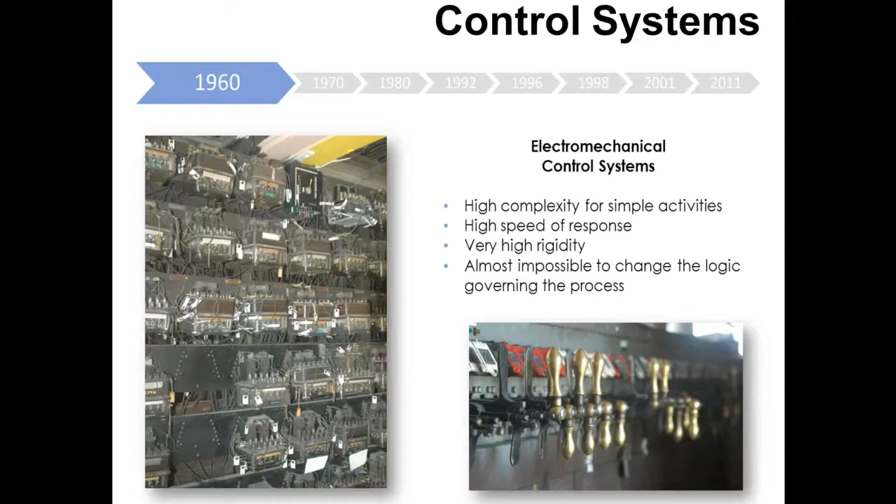In the 70s, something changed, and the main thing was that this guy, Dick Morley, installed the first PLC at the General Motors Oldsmobile. Looking at that device from our days, it's a very low performance device, but it introduced a new element in control system: flexibility and configurability. So the ability to change the logic that controls the process in an easy and user-friendly way.

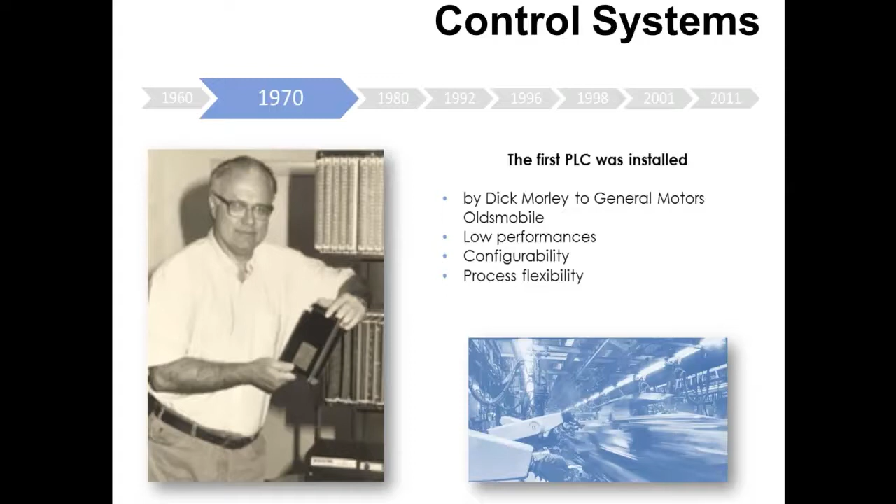In the 80s, we see the coming of personal computers. They are small size, low cost, low performance devices, but they are easy to program, and this enables to think to a new utilization of this kind of devices even in the industrial world.

In 1992, the timeline of the control system intersects my personal experience as I start to work in an industrial automation company. And what I face from the beginning is that the PLC is taking over the electromechanical logics. There are still some dedicated analog boards to perform control tasks, especially speed control or synchronism between motors and so on. But almost all the complex logics are in charge of the PLC.

The cost of the CPU is reducing, the flexibility is increasing, and the programming tools are absolutely becoming user-friendly. And this enables a wide number of users to develop programs to perform process control. On the other side, the human-machine interface is many times still developed using aluminum boards with LEDs or lamps to indicate the status of the devices.

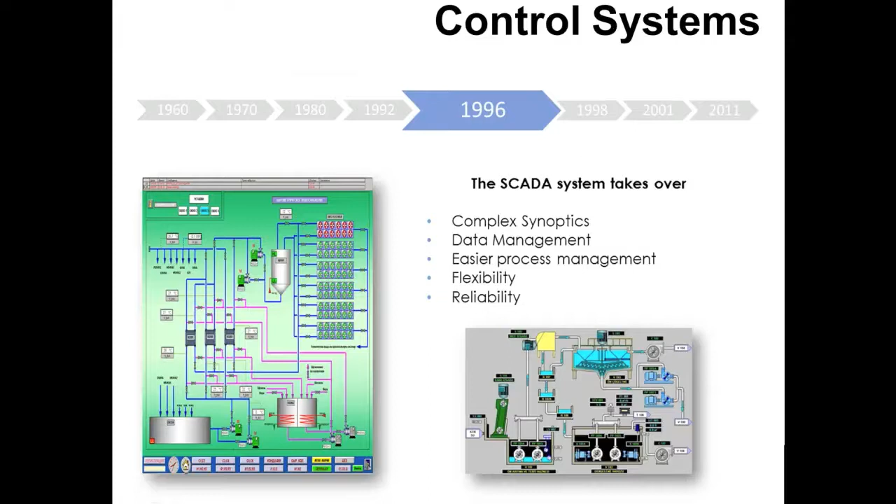1996, as I told you, we start Autoware, and we start to develop SCADA systems, and SCADA systems are going very fast to take over the aluminum panels because they enable the development of complex synoptics, they enable to start to do some data management, they make the process management task easier for the operators, and mainly, again, they introduce flexibility and reliability.

1998 is an important year for us. We developed the first performance control system or performance measurement system. It's a pretty simple system, but it manages downtime management, it manages good and waste count, it provides real-time information to operators, it replaces almost all the paperwork in the company to collect this information, and it permits the company to increase the efficiency by about 30%.

Why is this important? It's important in my opinion because the focus for the first time, at least for us, is not anymore in the process control, but it's in the process performance measurement, which is something completely different from the beginning.

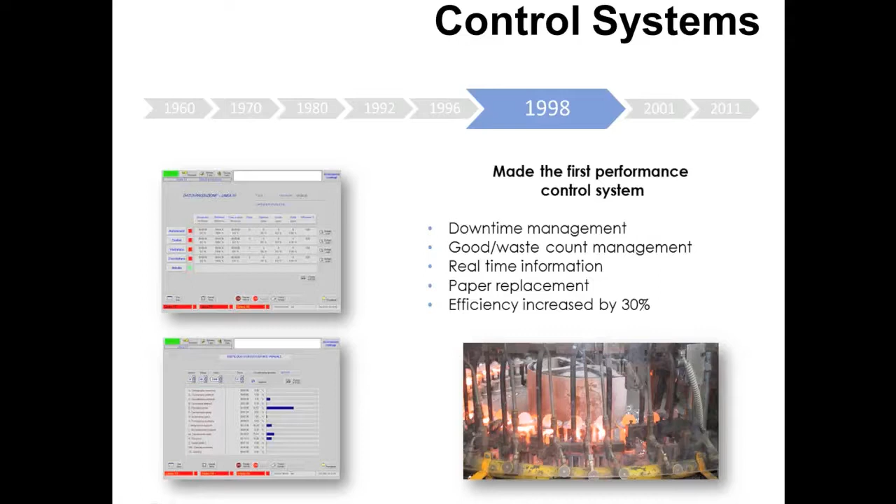2001, a new step further, we created the first complete MES system. The focus is not anymore just on performance management, but this MES system manages raw material, tracking, tracing, production order dispatching, identification, efficiency of course, and it interfaces with the warehouse management system to upload the data regarding the finished

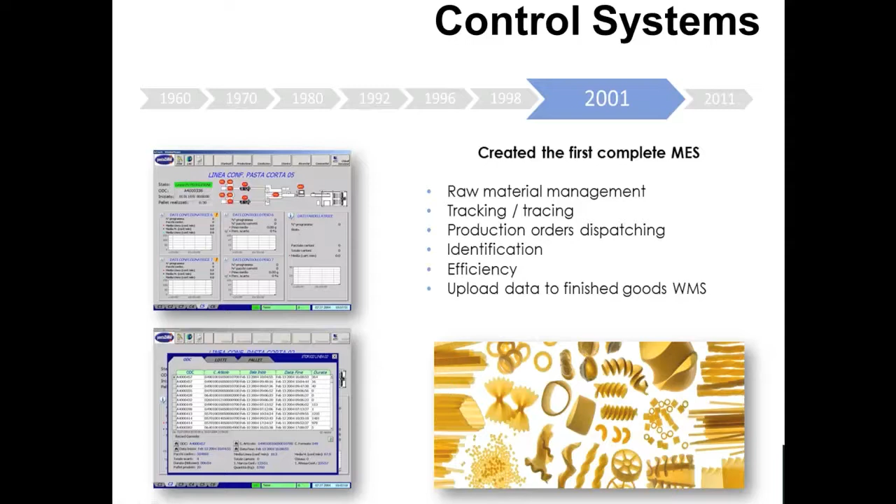goods. So again, this is important because the focus in this case is not on the process, but it's on the coordination of different processes that constitute the operations. What about 2011? What have we to expect? Well,

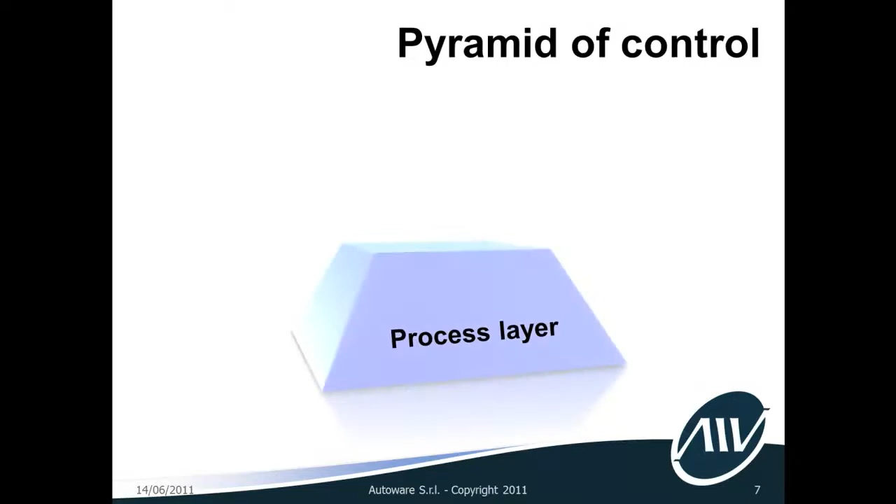we all know the pyramid of control. It's a well-known pyramid, 3-layer pyramid, where at the bottom we have the process layer. It's a layer of devices, it's a layer of actuators. In the middle we have the control layer. It's the layer where the PLC implements all the process rules and all the process control.

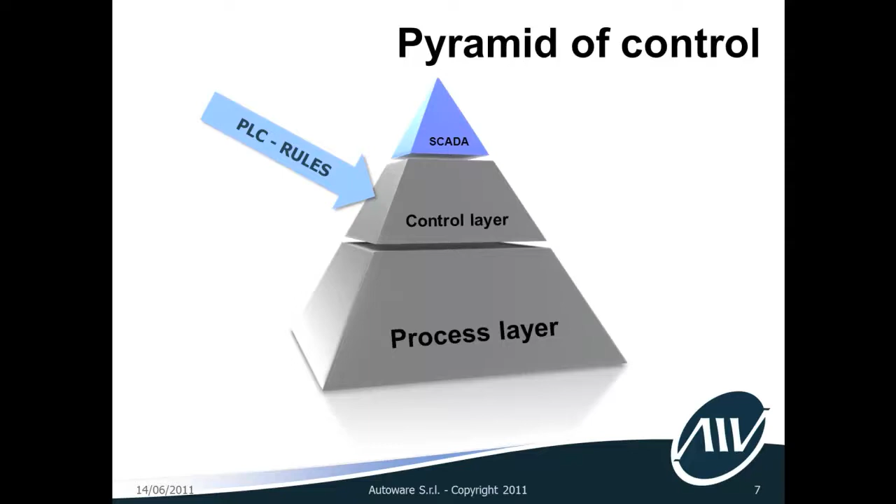And then on the top we have the SCADA layer. It's a layer where the information is presented to the user, where the inputs are collected, and where the information is displayed. During time, this pyramid evolved, and all the control pyramid that we just saw is embedded in a new bottom layer, which is called shop floor layer.

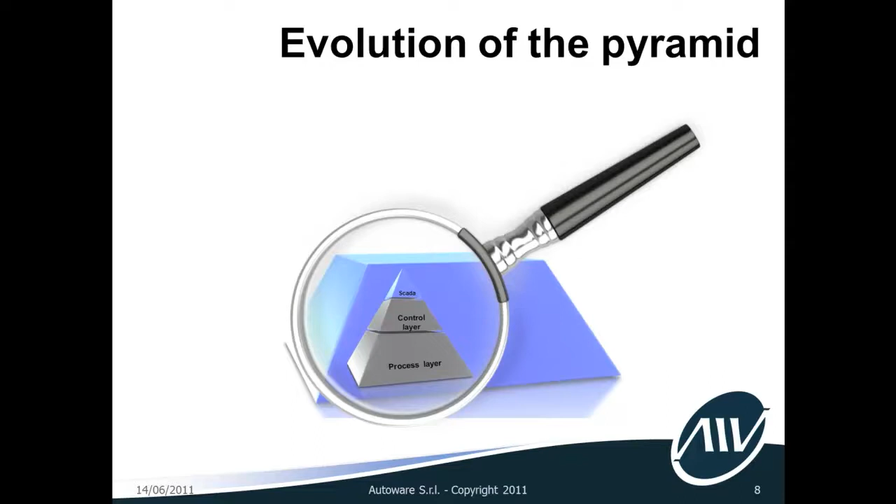On the top we have the ERP, which is the layer of strategic decision in a company, and in the middle we have the gap that is normally filled by MES, or as the MESA, the Manufacturing Execution System Association, now starts to call MOM, Manufacturing Operations Management Systems. And these are systems that have as a goal to fill the gap between the shop floor and the ERP and make these two different worlds communicate with each other.

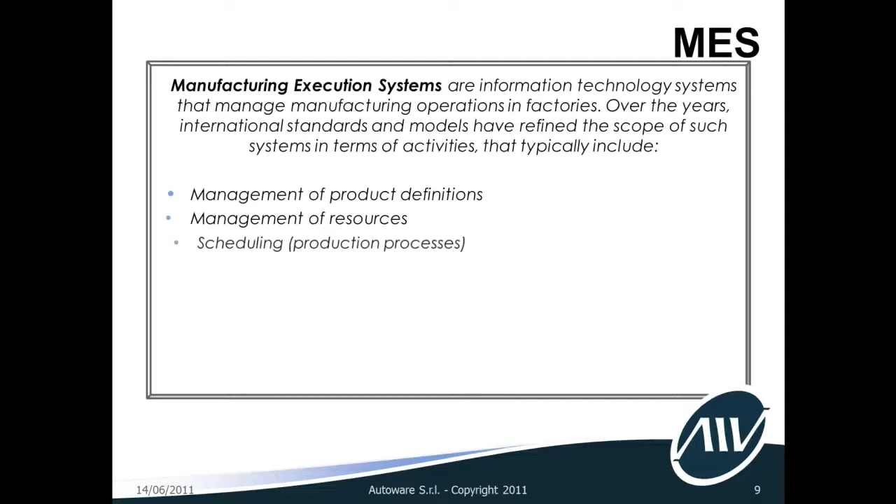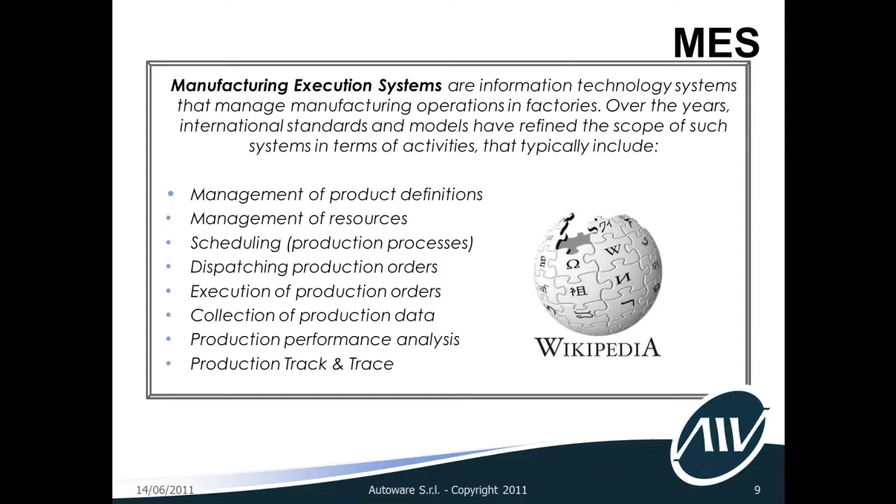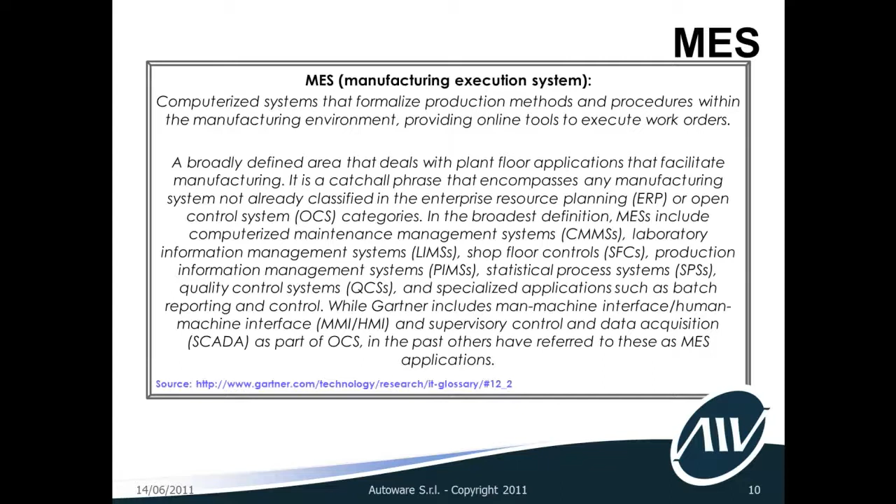What are MES systems? There are many different definitions that you can find about them. They vary from the very easy definitions like the one that you can find on Wikipedia that focus on the different functionalities of MES systems, to more business-related and complex definitions like this one from the Gartner Group, to a description in terms of a standard model that was approved by the MESA, which defines the MES system in terms of data, relationships, flows of information.

But the definition that I like more is the definition that one of our customers provided. And he said in 2002 that MES means meglio esserne senza, which translated in English is it's better to be without it. But in 2007, for him, MES was mai esserne senza, which means never be without it. And in my opinion, this is a measure of how important an MES system became in a company. So important that the company itself feels that it cannot work without it anymore.

The market of MES systems is still a growing market. There is a lot of potentiality in it. From this study, from an analysis of Frost and Sullivan, the market in 2009 was about $3.6 billion, and is going to become a market of $8.2 billion in 2016. So it's going to double in almost 7 years. So there's a lot of work to do in implementing MES systems, and there's a lot of space working on them.

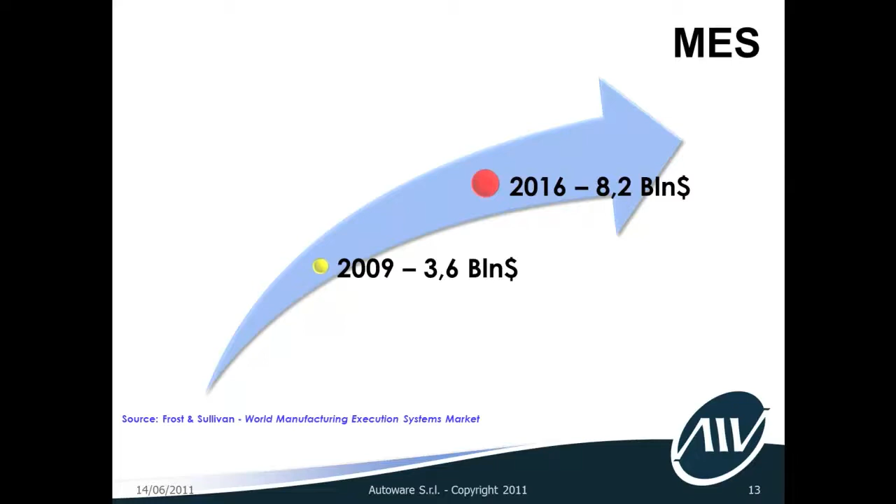But MES systems are even showing some limits, and the limits are mainly related to some staticity, especially if compared to an organizational environment that is changing frequently and terribly fast. Many actions are still dependent, even if the company has an MES system, on the human factor. There's no guarantee about responses, and the flow of information and decision is just partially managed. Or, on the other side, all these things can be accomplished, but all these activities and all these rules have to be hard-coded in the system.

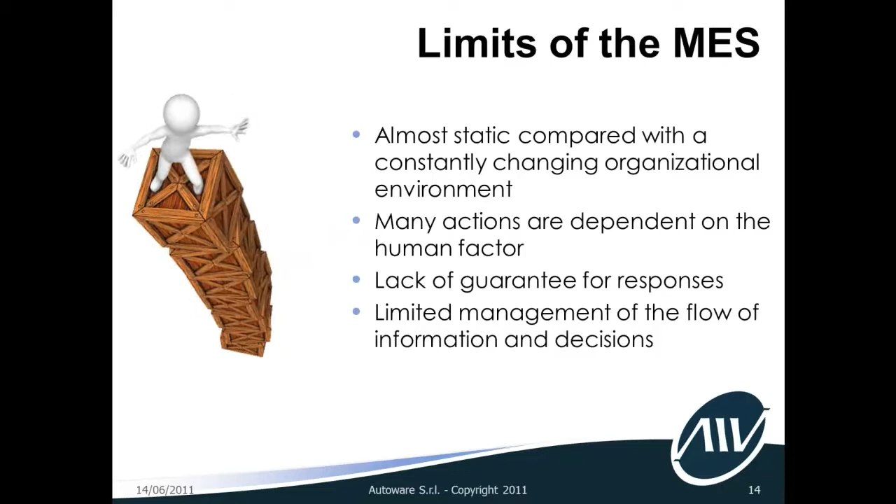While today the market is requiring quality, for sure, is requiring certainty in terms of information, in terms of responses. It's asking for cost reduction to all the companies to survive in the market and remain competitive. It's requiring the companies to be independent from the people. The experience cannot be anymore only in the brain of the technicians or of the people working for the company, but has to become property of the company itself.

The market asks for speed in answering the inputs from the market. It's asking for efficiency, but mainly it's asking for flexibility. It's asking the organizations to be flexible and very fast in adapting to the always changing market conditions.

So, fortunately, there are some technologies that are, let me say, new, and that can help companies to achieve and to respond to this request from the market. These technologies, as always happens, are well known at a different level. They are well known at the ERP level, and they are known as business intelligence and business process management.

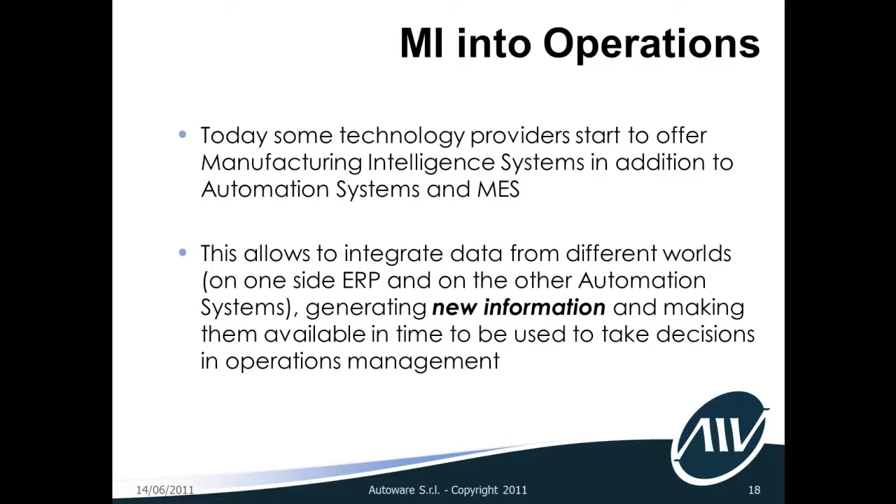And today, some technology providers start to offer manufacturing intelligence systems in addition to automation systems and MES systems. This allows integrating the data from different systems and generating new information. And this information, and this is the important thing, is made available to the users in time for taking decisions about how to manage operations. So the users who are in charge of operations management can rely on a new set of information that arrives to them in real time and that was not available before.

What is BPM, or workflow management? It's a tool or a suite of tools that helps organizations cope with frequent process changes, because a workflow management system makes the description of processes easy, explicit and visible. And these tools enable the companies to modify the description of the process in a very flexible and fast way. And even in this case, many technology providers today are starting to offer workflow management systems in addition to MES systems or automation systems.

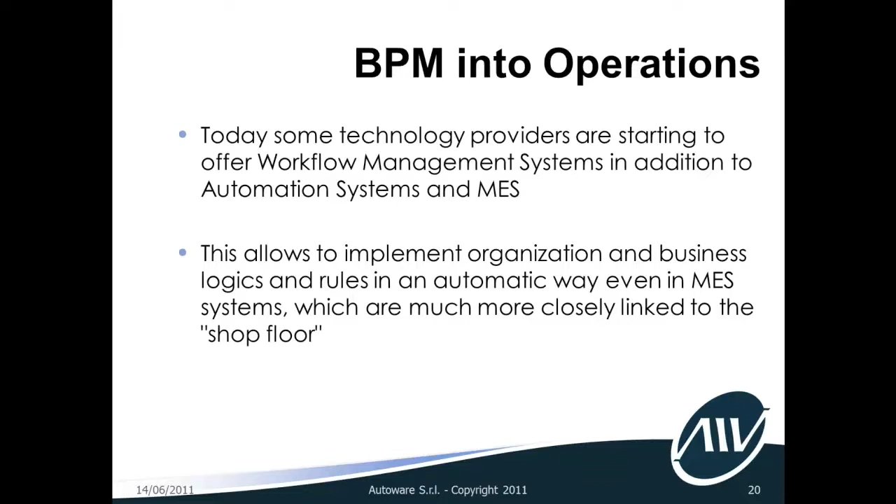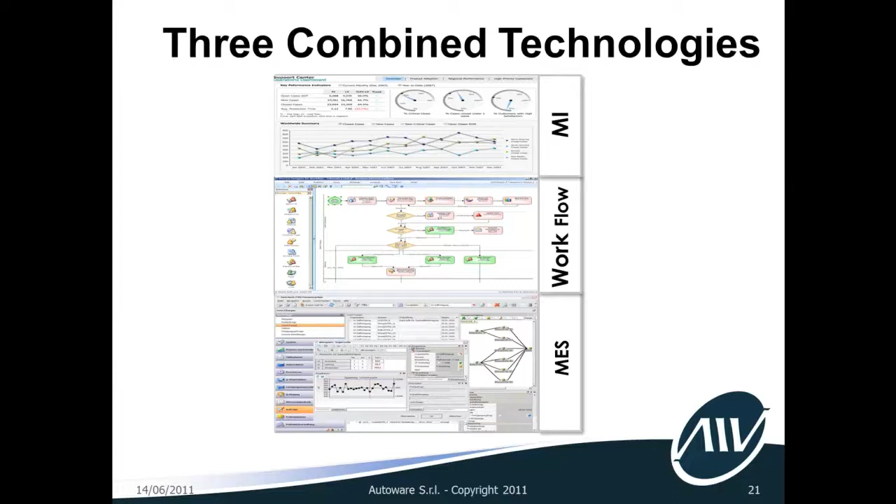And this allows the company to implement rules and logics related to organization and to business tasks in an automatic way, even inside or related to MES systems, which are much closer to the shop floor. So we have three combined technologies available: the MES system, the workflow system, and the MI system. And these three technologies constitute three different layers. So it's pretty easy to create immediately an analogy with the control pyramid. And we have a new pyramid available today.

We have a pyramid where the MES layer is the bottom layer. It's absolutely analogous to the process layer. It's the layer where we have the execution and control, not of the process in this case, but of the operations tasks. We have the workflow layer, which is almost identical to the control layer. It's the layer where the business, the operations rules are processed. And then we have the MI level, that is equivalent to the SCADA layer. It's a layer of presentation, where data are inputted by the operator, where the information is generated. And this information can be used to trigger rules at the execution layer.

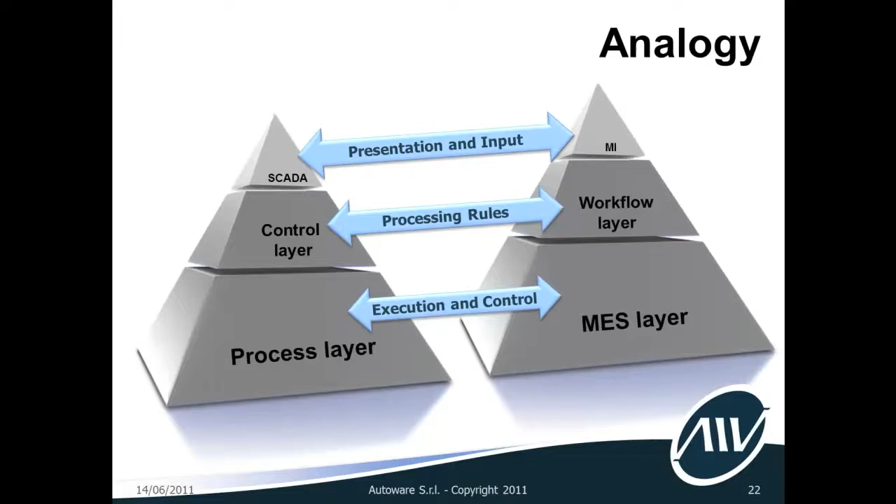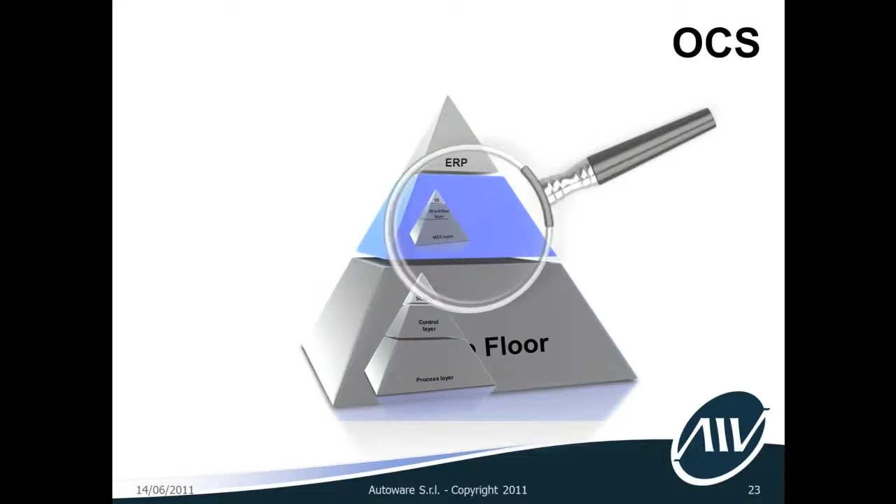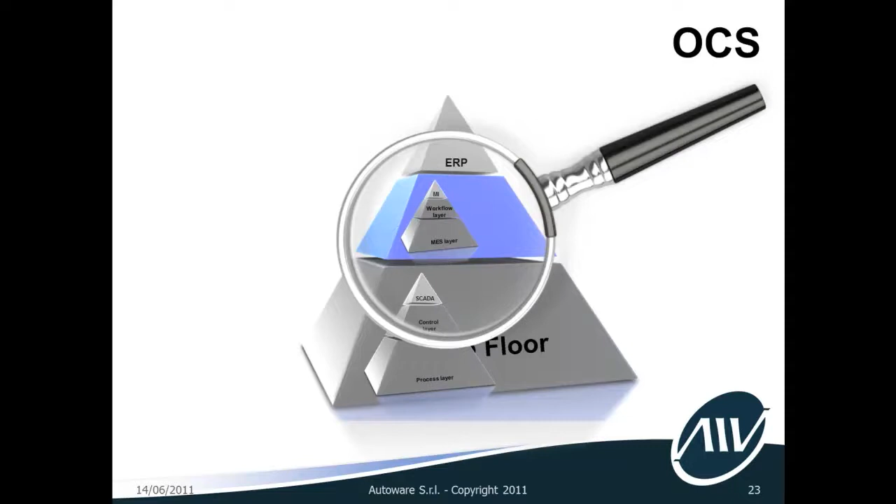So, as we saw before, where the standard original control pyramid was embedded in the shop floor level, we have this new pyramid composed of the MES layer, the workflow layer, and the manufacturing intelligence layer that becomes itself a new layer. So the layer that was before the MES layer can now be considered the OCS level, the Operations Control Systems layer.

So operations control systems are automatic control systems of the operations. They are systems that provide the possibility to model in a very flexible way the rules that manage all the operations. And moreover, they are systems that implement and run these rules in an automatic and controlled way. So the company does not need to rely anymore on the goodwill of the operators to have the rules followed or the action taken, but their implementation is guaranteed in the way and in time of execution by the OCS, the operations control system. And all the decisions, all the rules, all the flows of decisions and of information are tracked and documented.

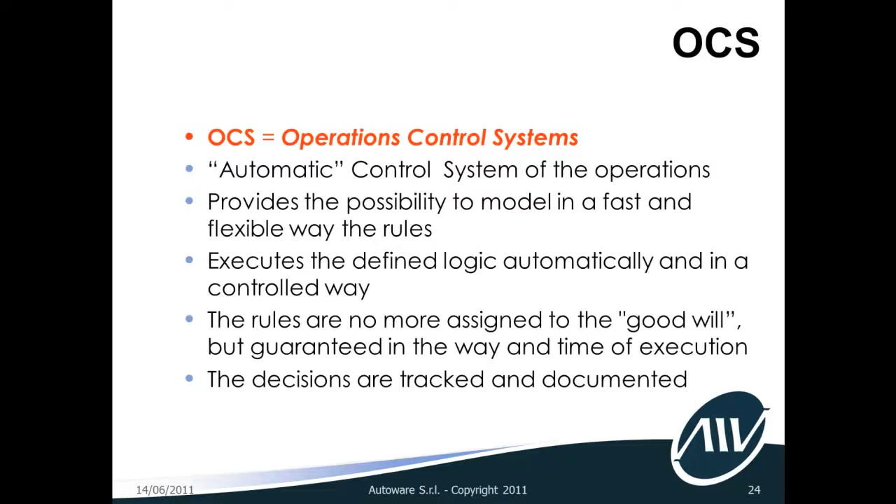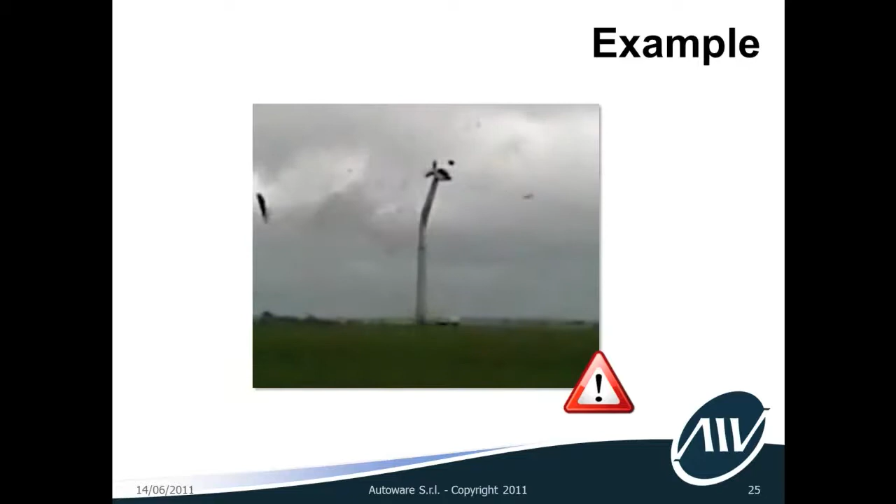Let's see an example. We've chosen an example that is related to a maintenance flow, and this example starts from a terrible accident of a windmill in a wind farm. So the windmill collapsed.

What was the cause of the accident? Well, the cause of the accident was a maintenance problem. They had repeated alarms that indicated an abnormal situation, and these repeated alarms triggered a maintenance procedure. So the maintenance technicians were advised by email or by SMS by the system, and they step in and solve the problem. But what went wrong?

The technicians that solved the problem didn't reflect the changes in the documentation of the system. And this enabled two possible situations. One, that if he had to do a different maintenance job on the same system, he could forget what he did before. But what really happened was that a different technician had to work on the system later, and he took some wrong decision because the documentation was not updated, so he had not all the information he needed to maintain the system and do his job.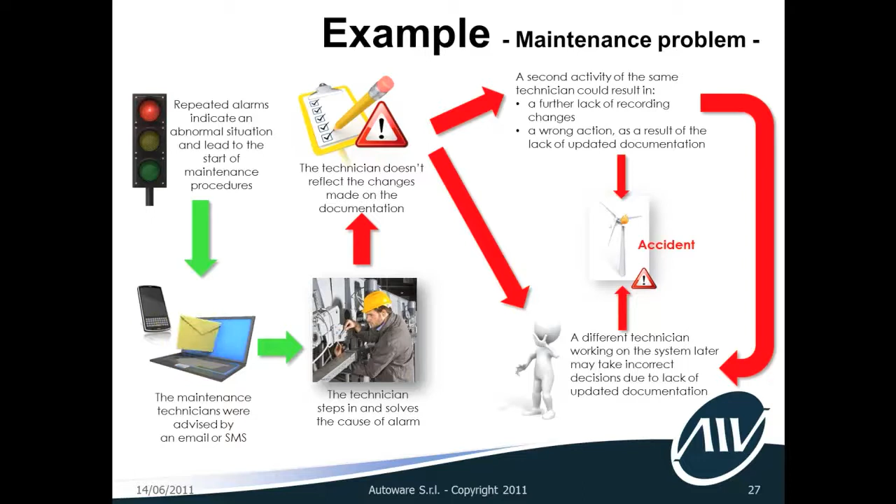Moreover, the system was running even if it was not necessary, because if the production planning manager could analyze data coming from the production scheduling, from the energy management system, from the shop floor and could analyze this data altogether, he could inform the plant manager that the windmill was not necessary anymore and it could have been shut down. This probably just could postpone the accident, but in any case it could be avoided.

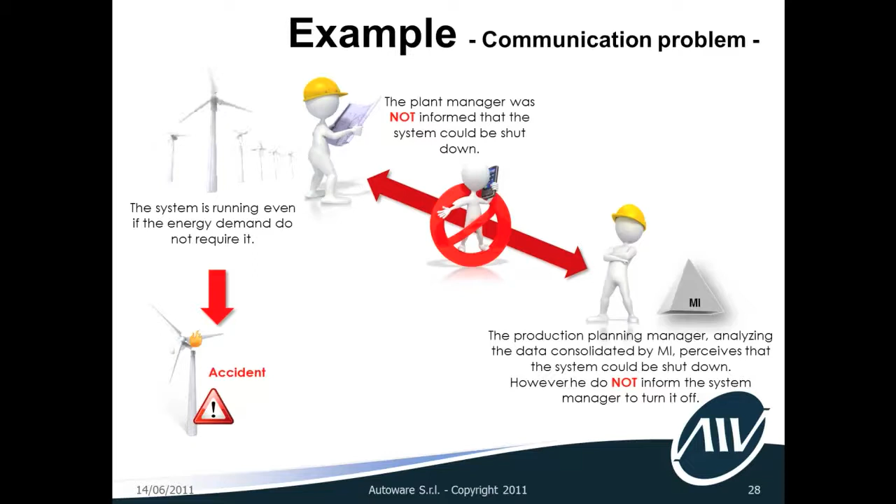So the error was not caused by a bad management of the flow of alarms or of the activity. It was caused by a bad management of the workflow related to the activities that were triggered by the alarm, and in particular by the documentation management.

So what could happen with an OCS system in place? Well, the beginning is the same. Repeated alarms indicate an abnormal situation and lead to the start of a maintenance procedure. The maintenance technicians are advised by email or by SMS, as before, but at the same time, even the plant manager is notified of the failure of the machine.

And a technician can take ownership of the task, and he could perform all the activities to replace the faulty components, but the system drives the technician to update the documentation and guarantee that the task is not completed before all the steps are completed. So the system itself guarantees that the documentation is updated with the latest information, so to guarantee that the future maintenance activities can rely on updated documentation.

The system can even provide some features to escalate in case a technician does not answer the call in the time that is defined by the company, and the plant manager himself, if he's not notified that the maintenance activity has started, can involve a different technician and guarantee that all the activity is performed in times that comply with the business policies.

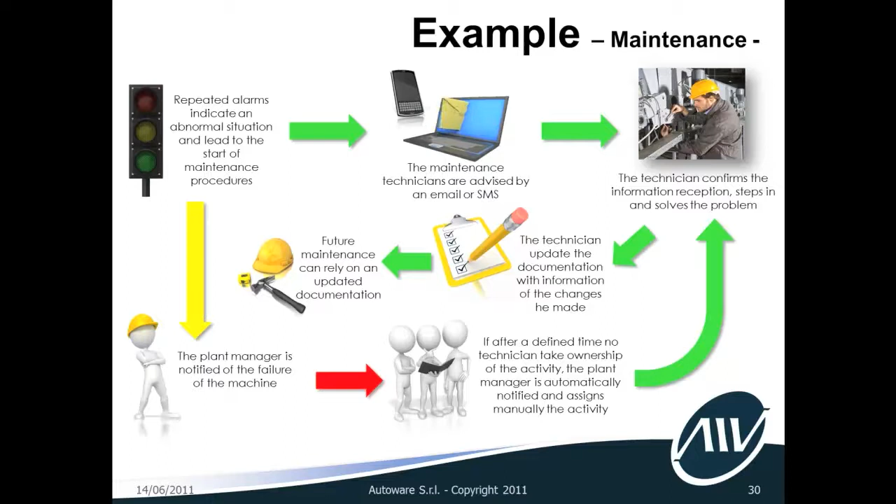But more than this, the manufacturing intelligence tool, aggregating data from the production planning, the status of the lines from the shop floor, and the energy management system, could elaborate all this data and generate new information that defines that the windmill is not necessary at the moment. And the production planning manager could be notified of this information, and the system could guarantee that he informs the plant manager about this situation.

Or the system could inform the plant manager automatically using the information generated by the manufacturing intelligence tool. And this could lead to shutting down the windmill and avoiding the risky situation.

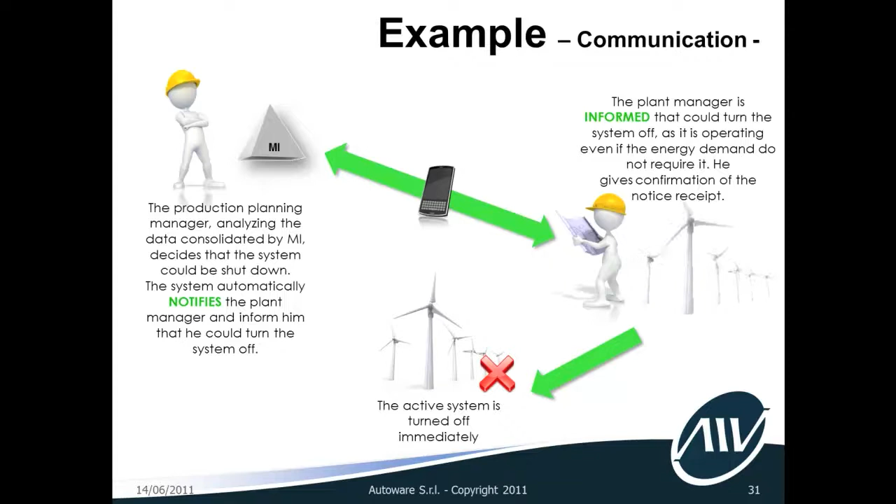So we saw that the benefits of having an OCS system in place are the ability to be reactive to inputs or situations that trigger activities, to have the guarantee of a response, to have the guarantee of being compliant with the company and with the business policies that are not anymore in the brain of the operators or of the people working for the company, but are defined and described and implemented in the system.

Reduction of bottlenecks. People are not bottlenecks anymore because the system takes charge of avoiding bottlenecks, escalating and guaranteeing that tasks that have to be performed are performed in the right time. Independence from people. Guarantee of information, providing the right information in the right time, in the right places, and automatic response.

That's all about OCS, about our idea of the new frontier of MES that integrating these three new technologies can bring to a new class of systems, the operations control system.